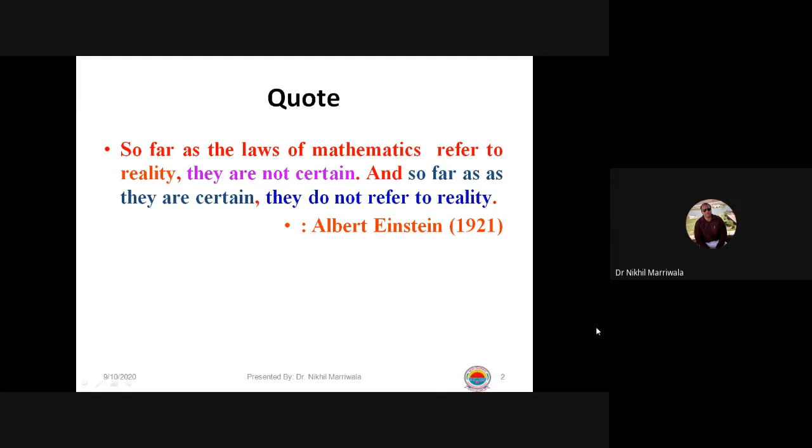And this is true. So that is why we normally refer to his statements and his research work, or the literature that he has given, before we start anything of the mathematical part.

Similarly, because we are talking about fuzzy logic, Zadeh has to be quoted in respect, and he is known as the father of fuzzy logic. What he said is also very important for us to understand: as the complexity rises, precise statements lose meaning, and meaningful statements lose precision. This is very important, because we are dealing with some ambiguous, very complex systems which are normally used in daily lives, and we will be designing one of those.

So when we are talking about some ambiguous systems, we need to understand what the concepts are and how effectively we can resolve the problems. Zadeh has given us very important input on this particular aspect, and we will be using this while we design the system.

This particular lecture would talk about all these aspects: the introduction, motivation, objectives of what we want to achieve, the basic block diagram. I'll show you some of the literature review also for this, because I'm trying to gather a working model for a greenhouse system, and then we'll talk about how the process flow happens. I'll show you the working model also.

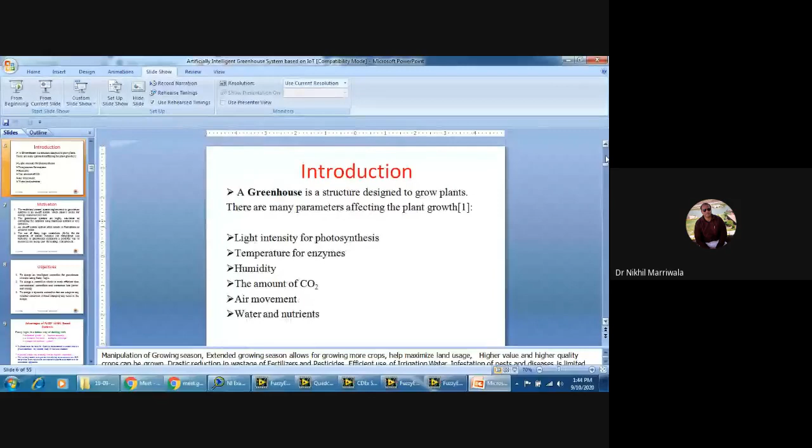I don't know what happened, this is just stuck. I'm so sorry, the presentation just got stuck in between. Nevertheless, I think there was a problem happening there. So, are you able to see the screen clearly now?

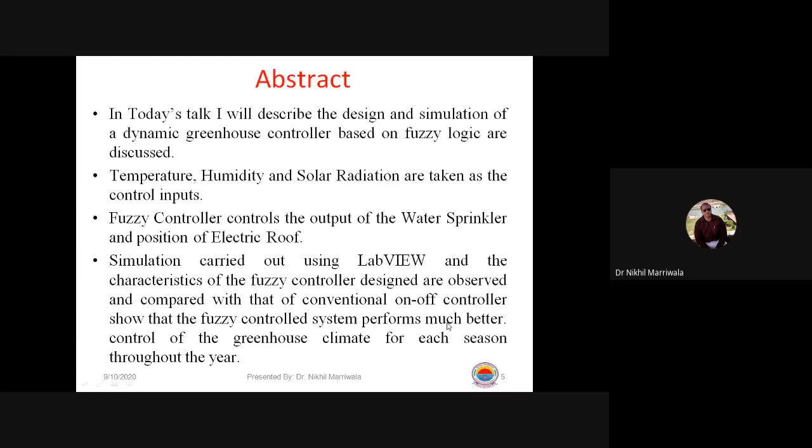So what is a greenhouse? For the benefit of those who don't know, basically it is a structure designed to grow plants, and there are many parameters affecting a particular greenhouse structure. This is an artificial structure we erect to artificially grow or provide an environment where plants can grow under controlled conditions.

So what is done is that light intensity for photosynthesis is controlled, the temperature for the enzymes is monitored and controlled, humidity is controlled, and the amount of carbon dioxide, air movement, and water nutrients are basically controlled in this.

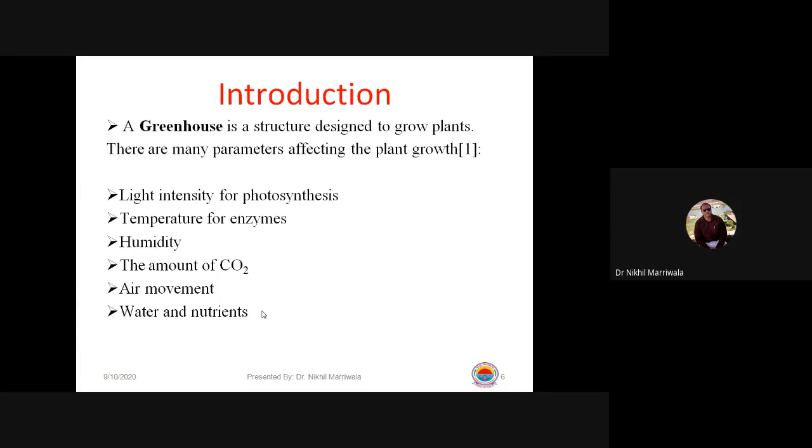A structure which helps us grow plants irrespective of the temperature, irrespective of the seasons or other things. So we will be monitoring and trying to control this artificially through an artificial intelligence technique, namely fuzzy logic. So the traditional greenhouse systems basically are,

if you've seen it, they normally work on on-off systems. So we are trying to replace this on-off system with a fuzzy logic controller, and it will analyze the inputs and then produce the output accordingly.

Greenhouse systems are highly non-linear in nature, very complex because they deal with many aspects in real time. So this is one of the best examples I could have quoted for fuzzy logic implementation. The use of fuzzy logic controllers thus becomes very easy for us to implement for these kinds of systems, like the greenhouse.

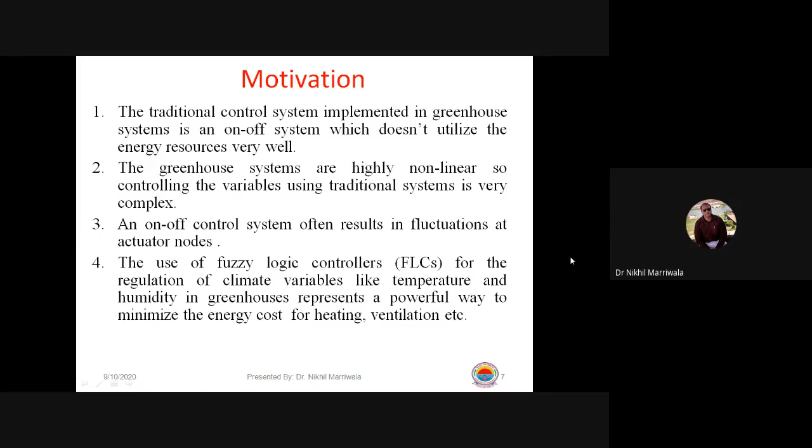So the objectives are very clear for us: we need to design an intelligent controller, and it will be intelligent because we'll be utilizing the AI technique of fuzzy logic. So to design this controller,

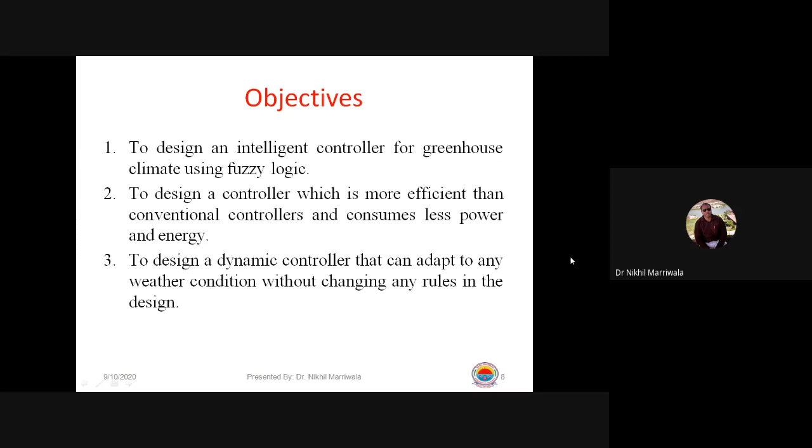we want more efficient controllers, to increase efficiency and ensure that less power is required, because a lot of power is wasted in opening and closing of vents in a greenhouse, or starting the water sprinkler. We want to save the farmer money in all respects. That's why we are talking about designing a dynamic controller based on fuzzy logic.

Now, what is fuzzy logic, basically? I hope everybody understands this. Fuzzy logic is a system dealing with ill-defined values, ill-defined systems, imprecise knowledge, ambiguous conditions, and highly complex, non-linear systems are taken into consideration when we talk about fuzzy logic. So it circumvents the need for rigorous mathematical treatment.

And when we talk about mathematics, we talk about some modeling that needs to be done for the system we are trying to prepare. And it provides linguistic expressions for us to actually understand what fuzzy logic would talk about.

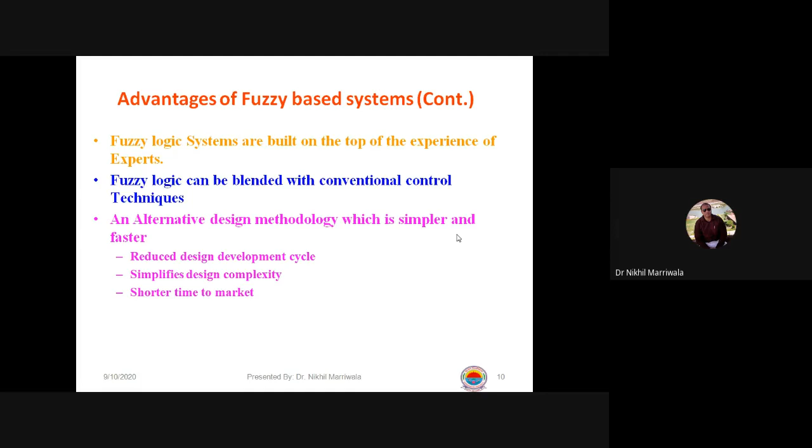Fuzzy logic systems are built on top of the experience of experts, and fuzzy logic can be blended with different conventional control techniques. So this is what we are trying to do: we are trying to blend it with the on-off controller, replacing that on-off controller with a fuzzy logic controller.

So linguistic variables mean we will be referring to if-then-else statements, and these if-then-else statements are basically the backbone of any fuzzy system designing.

And once these are fuzzified, the rule base is generated in a linguistic manner, that is, if-then-else. So if temperature is this, humidity is this, solar radiation is this, then the output is this. So this is the implementation.

Once the implementation of the rule base is done, the defuzzification model is utilized. The defuzzified output is then given to the greenhouse actuators - the water sprinkler and the opening and closing of the roof, done via the controller. So these two behave accordingly.

So we'll see how this model comes into picture. We'll try and see this thing. So what I'll do is I'll just show you the system first.

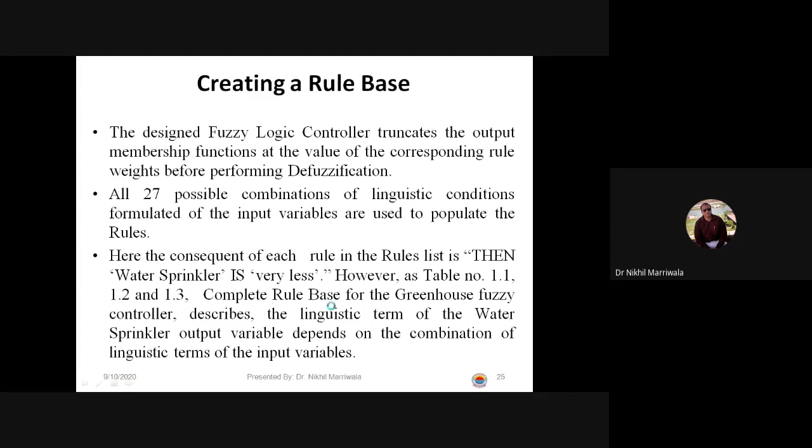I will come back to this. Yes, yes sir, 147 is the last. Yes, I have got it.

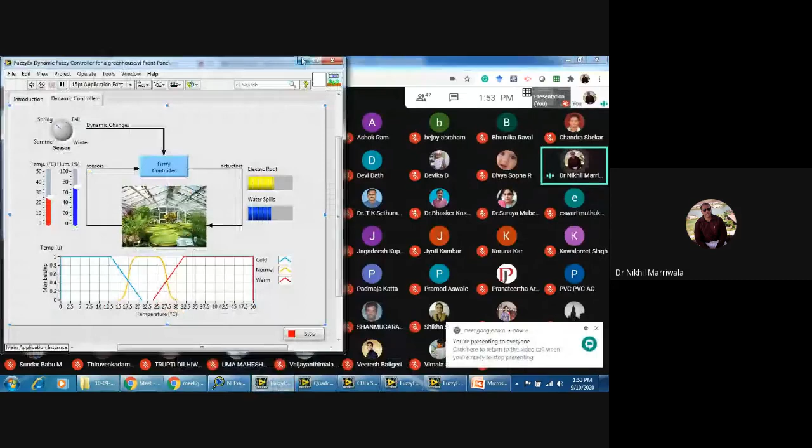Okay, so what I'll do is I'll try and explain now how this fuzzy system basically behaves. Now this is the model that I was trying to show you. There is one thing missing in this model right now - I told you I'll be talking about two models, so solar radiation is still missing here, but what you have is this fuzzy greenhouse basically.

This greenhouse is being controlled or monitored by different sensors over here. Now these sensors are controlled by the seasons also - dynamic changes happening, and the output is electric roof and water sprinklers. I'll tell you how to design it, right?

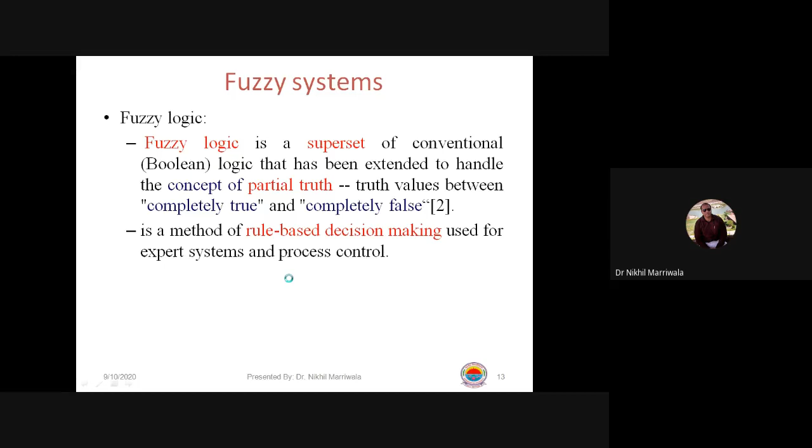So I'll just go back to the slides again and start with the literature review part. So fuzzy system - basically what fuzzy is all about is rule-based decision making, and we will be making some rules and then analyzing it on the basis of certain decision-making ability of the system. So we will be utilizing these things.

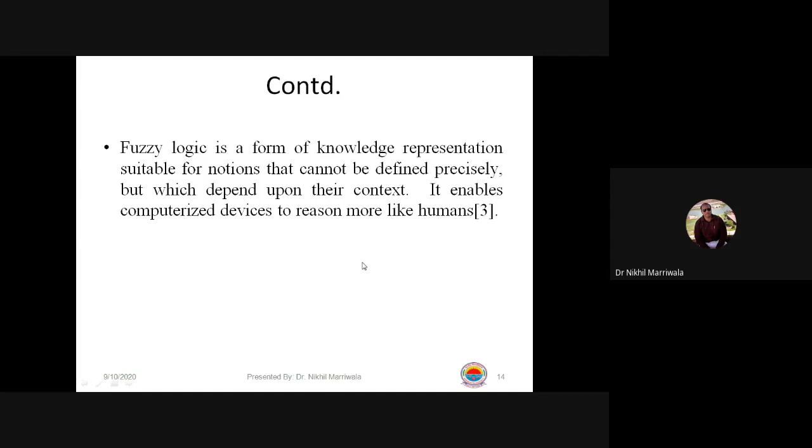The fuzzy logic basically is a form of knowledge representation, and hence we humans are being driven and monitored by different computerized devices. So the fuzzy logic controller is also one of those devices which is actually driving us in the form of linguistic variables.

So linguistic variables are what? They are temperature, humidity, solar radiation. As far as the greenhouse is concerned, it can be brake, speed, etc. - many inputs. Now see, temperature can be freezing, cold, warm, hot - these are some conditions, linguistic variables, right?

Humidity can be high, low, medium, whatever you want to talk about. So these are some things that we normally talk about in our own normal language. We have to represent this in the form of some modeling. So this is what we call fuzzy modeling, and linguistic terms can be represented in different categories.

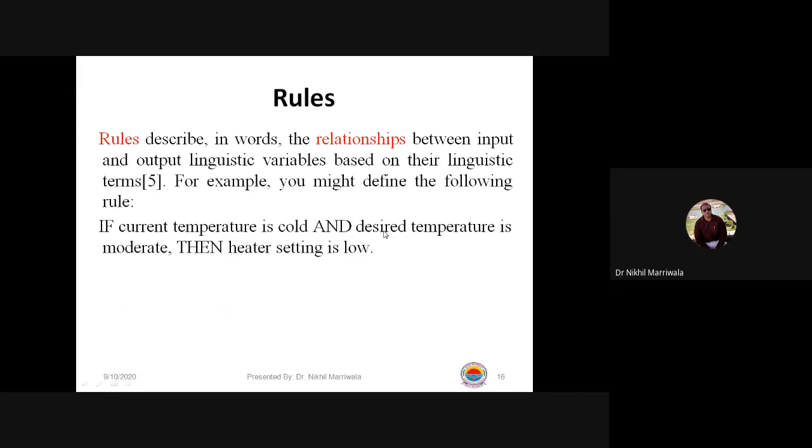So using these categories, we'll form some rules, and once these rules are formed, again, I told you that the defuzzification will be done after this. So how are they done? This is the one that we'll do.

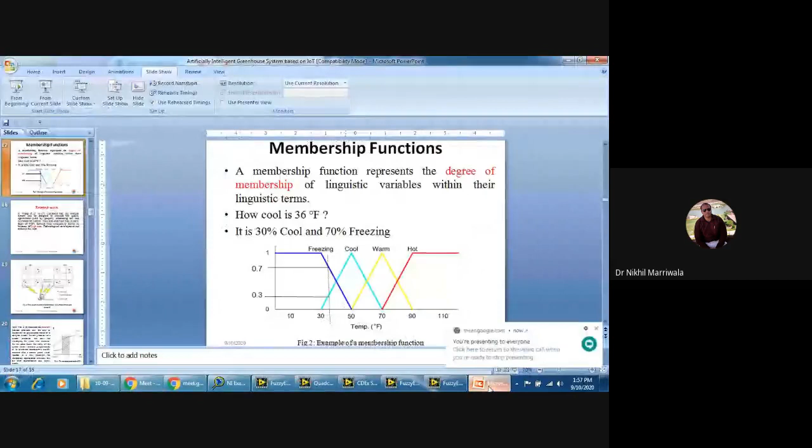Are you able to hear my question? Sir, once again repeat the question, sir. I'll show you the question again, ma'am. This is here, okay, right? So this is the diagram that you can see. This is a temperature in Fahrenheit, and I'm asking how cool is 36 degree F?

36 degree. How cool? Yeah, how cool? In between freezing and cool, sir. Yes, yes. So this is what I wanted to just know. Now you've answered very correctly. It is in between. There is no correct value given, 1 or 0, if we represent it in the form of digital, right?

So it might be 30% cool for somebody. It might be 35% cool for someone, and 75% freezing or 70% freezing. So there can be some variations in this, right? Now, how will we deal with these ambiguous inputs that are coming in? What I'll do is I'll show you how we do it.

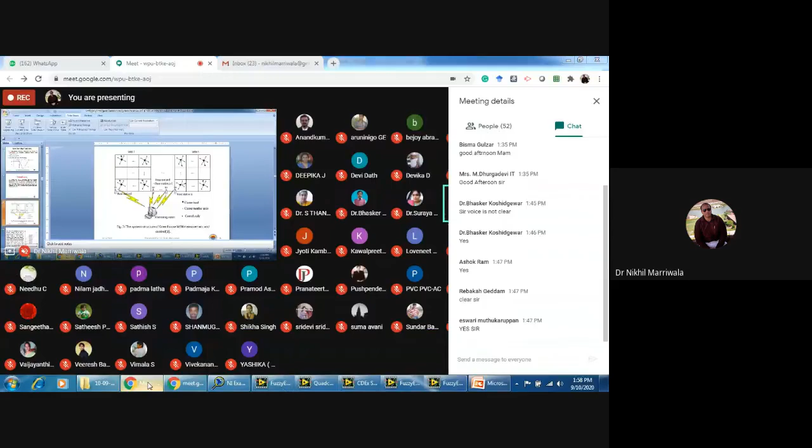So I'll straight away move to designing of a particular system here. Now what I'll do is I'll show you. So again, we move back to our old software called LabVIEW. Now I hope everybody is familiar with the environment of front panel and block diagram. And once you install this, you will see control design and simulation coming over here, and you'll see a fuzzy system designer, right?

We have tools, we have control design and simulation, and we have a fuzzy system designer over here. You just need to click on this now. Have a look what would happen after this, and we will be using this in several systems, and I'll show you how effectively you can design things. Right now, this is the fuzzy system designer. We will have variables, we will have rules, and we will have a test system after this. Right, I'll show you the entire thing.

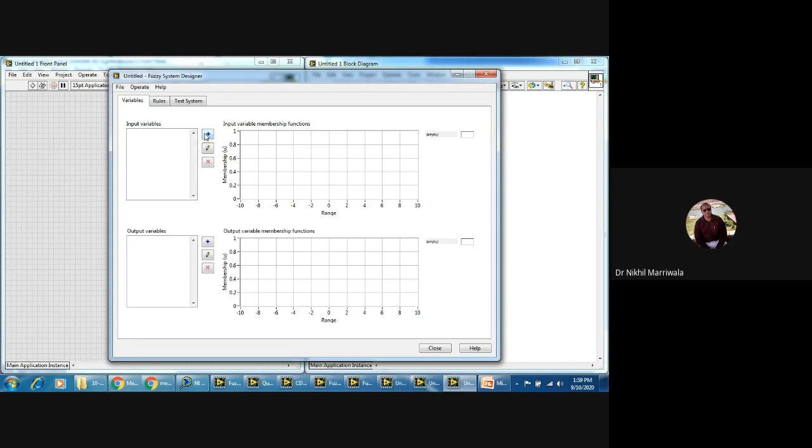So the very first part, just see it very carefully. You will be able to do it. You can do it in MATLAB also, but this is easier and more user friendly because this is a GUI, graphical user interface, right? So say we take this example of temperature, humidity, and solar radiation, and I write temperature. I have to mention this temperature, and say the range is from 0 to say 60 degrees. Okay. So the scale changes.

Now temperature can be either hot, cold, moderate, right? So I say hot. Here are the membership functions that I was just trying to show you. Say hot. I use a triangular input and I can change the color to red. So hot means say 50 and say 30. I'm just taking some random values, right? So you see the change has happened.

I can add another value, moderate. I can write moderate over here, and say I use a trapezoidal input now, and I can change the color again. I'll use a darker color so that it is visible, right? Fine. So we can start with 55. 45 is fine with me, and 25 can be taken, and then it will be 0, right? So moderate, and then it can be cold.

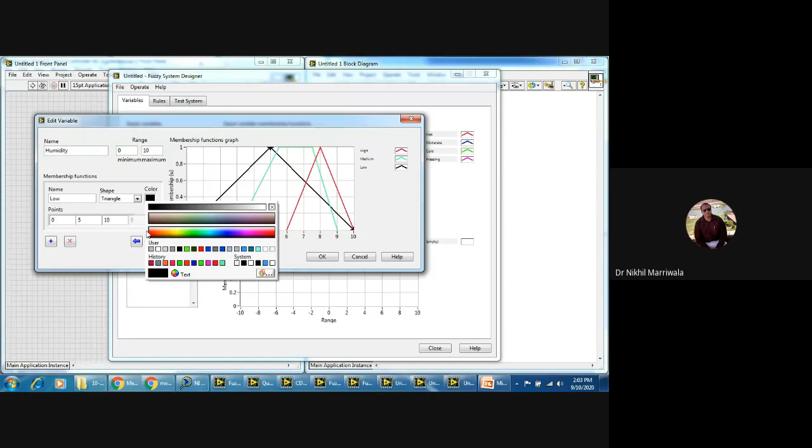Say I take a trapezoidal function, and I change the color of this line. I may not start with 10. I would say I start with 9. 7.5 value is taken. That is fine with me. 6.5 is another value that I want, or say 5.5, right? Okay, fine. This is just a small change, and I end at 3. So this is another value, medium, and then low humidity. I can take a triangular function again. I can just change the color over here. Already green has been used, so I think I should take a pink one. Yes, right.

So we can start by 5, 3, and then a 0, right? So now you can see we have two inputs, temperature, humidity. I can add a third one also, because for our system we are taking three inputs: solar radiation. So solar radiation maybe from 0 to 100 I can add. I don't mind that. This is just a random value again.

I am repeating it. So solar radiation is high. High, when it is high, I need to just specify that. 100, and 90, and then I can take it to say 80 value, or say 70 for that sake. We can see something happening: high, medium, and then again I can take a triangular function, whatever you want to do. So I'll take a medium as 90 to 70,

and then to 50. Okay, so you have another value coming over: medium, then low, right? So another triangular function is here. And I can start with say 60, 30, and say till 0. So I think that doesn't matter to us much.

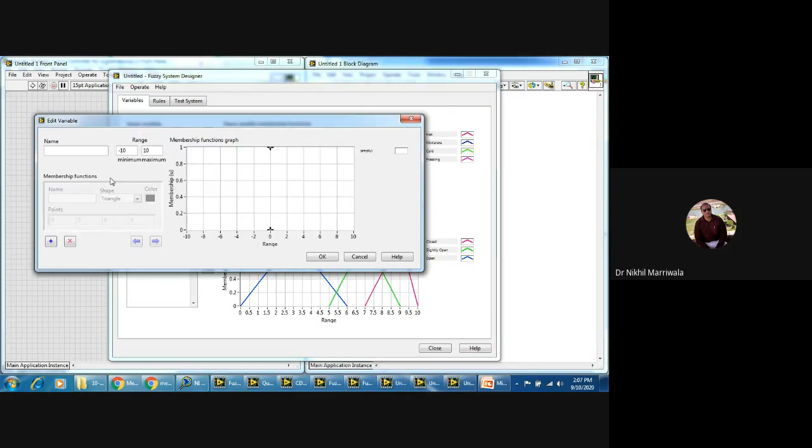So when it will be open, I can start with 6 and 3 and 0, so it will be open, right? So we have a water sprinkler over here. You can see this also added now. And the other output should be what? The roof, opening and closing of the roof, right? Again, you can use some values in this case. Add a value.

Say fully open or fully closed. I can write this name, and say I change this value 10, 9, and say 7. Fully closed. Add another value to this: slightly open. So you can see I'm just talking in our own language only, right? And still I'm trying to analyze the system. I'll show you how this analysis is done.

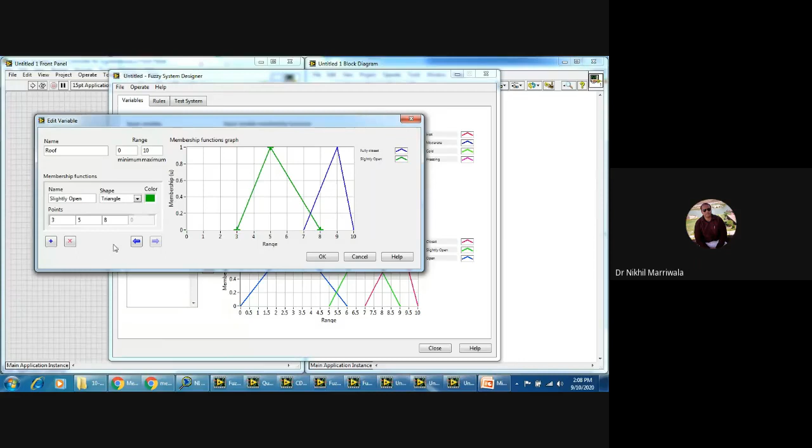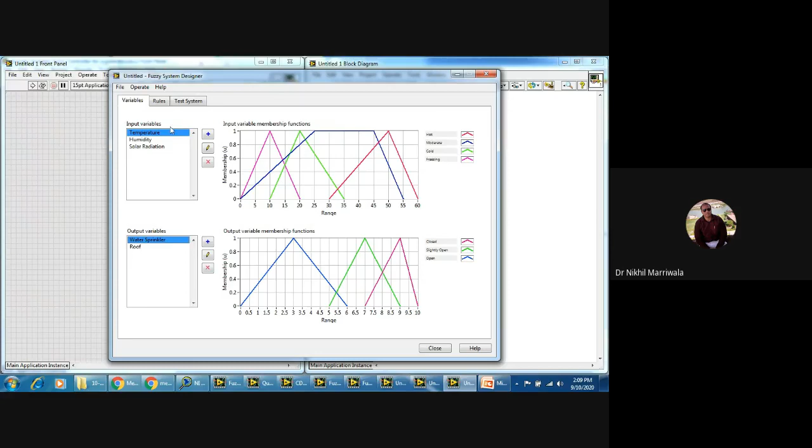8, say 5 and 3 over here, right? And it can be more open or whatever you call it, right? So 6, 3, 0, right? So we have just created the things: temperature, humidity, solar radiation, water sprinkler, and roof opening, right? So some random values have been created here. This is Fuzzy System Designer in front of you.

Now we move on to rules and we will formulate some rules. So you need not do anything. This is the beauty of this system. Have a look over this. Add rules. I just pressed add rule. If temperature is hot, then water sprinkler is closed. Now this is a simple rule. Now what you want to do is you want to add some further things to it.

So what you can do is, if temperature is hot, humidity is high, and solar radiation is also high, then what happens? Then water sprinkler is closed. Or you can do another thing, then the rooftop also is fully closed. Now you can see the addition in the rule happening over there. Can you see this? It has automatically been added. So I add another rule.

If temperature is hot, add another antecedent. Or say I change moderate, medium, add another consequent to it. Slightly open, fully closed, more open, and you can do whatever you want, right? Are you able to see this? Are you able to acknowledge what I'm trying to do here? Yes, yes, yes, sir. Now can you see how easy it is? Yes, sir.

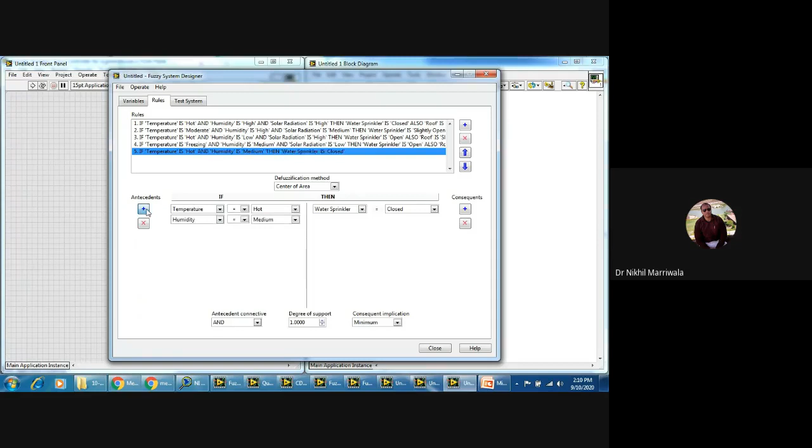Right. So I'm just randomly selecting things. I'm not doing any other thing. Yes, I can definitely make my rule base according to what I want, right? So there can be so many rules that can be made, and if you see, it is very interestingly poised for us that we have nothing to do in this case, but we are able to analyze our linguistic functions. So say I have made some 5 rules for myself.

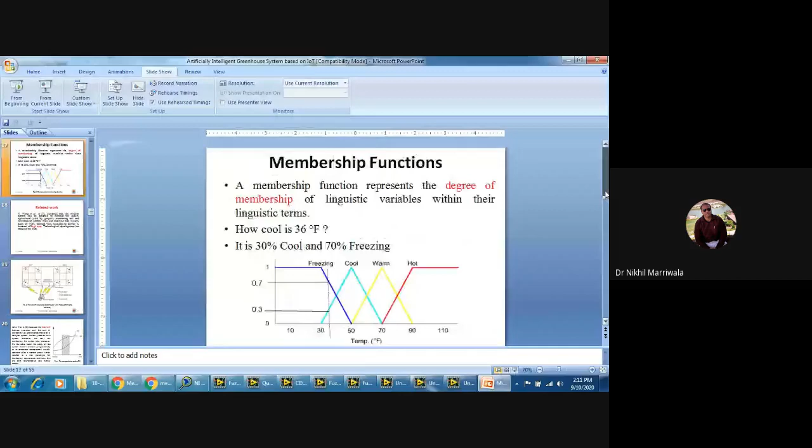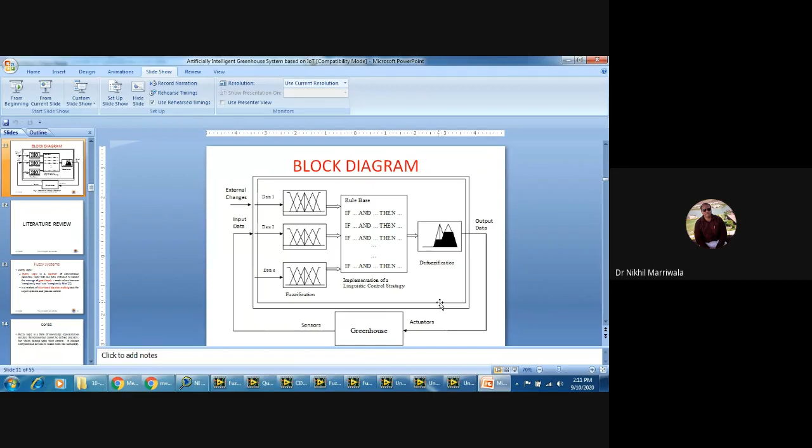So the model that I showed you, I'll shift back to the slide and show you the model again, right? So that we do not divert from that. Inputs, right? The membership functions, the fuzzification has been done. Now this rule base has been formalized. Now what we'll do is defuzzification, right? So have a look. We have variables over here. We formulated some rules, and now the test system. I'll show you how.

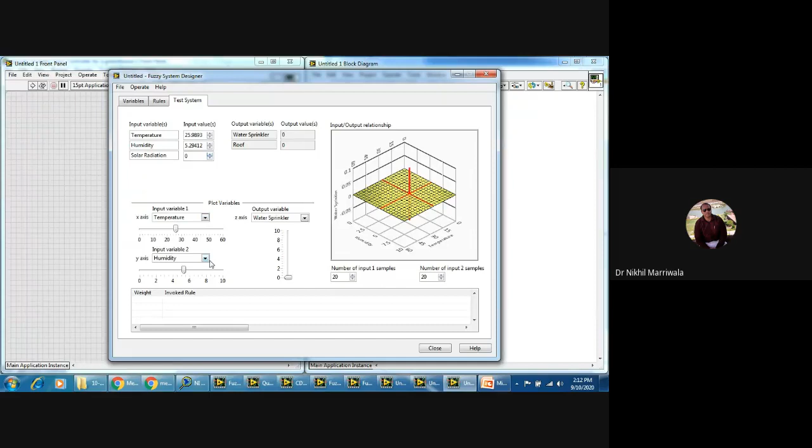Temperature. I'll just move the slider. Humidity. I'll move this slider to this, right? This is the output. Now this will be automatically controlled. Just have a look over this. And this is the rooftop, right? So you can view them, and solar radiation also. So as soon as I've changed this, now you see the values changing in the output part also. Can you see the change happening? Right? So pre-generate the rules. Yes, okay, do it, and you see the output over here. Can you see this?

Now, according to the temperature variation, the invoked rules are also coming at the bottom. You can see the changes happening. Even for solar radiation, right? You can see the rules either increasing or decreasing, and the weights are also coming into picture. And the pointer of the water sprinkler is moving automatically, though not much, but yes, it is moving, right? Now you can see the drastic change happening. Can you see this? Now this is the automatic process that has happened.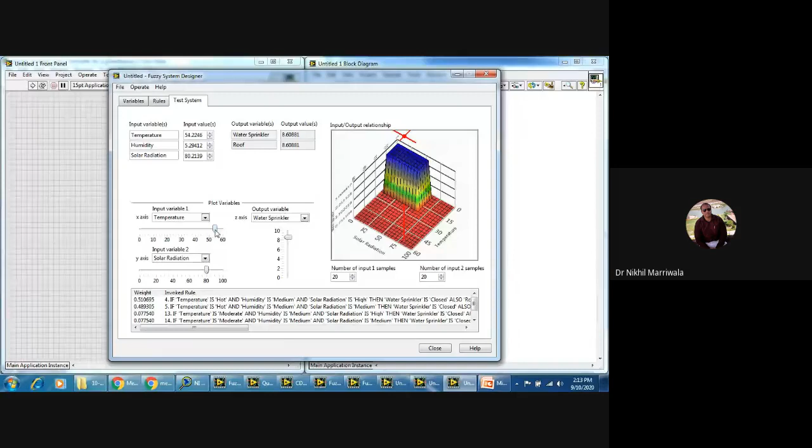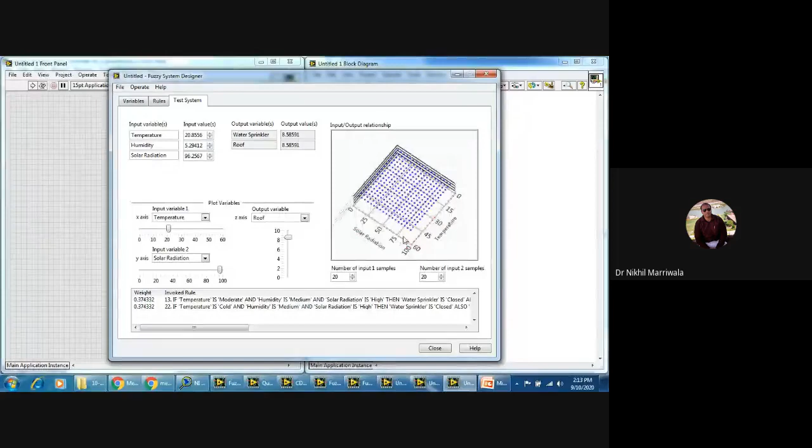You can see, right? Now if I change this to roof, again you will see the chart also changing. You will see the variation in the rules. So this is very much artificially intelligent control that we have tried to formulate for our problem, right? And the changes can be definitely monitored by authority. Am I clear up till this point, please?

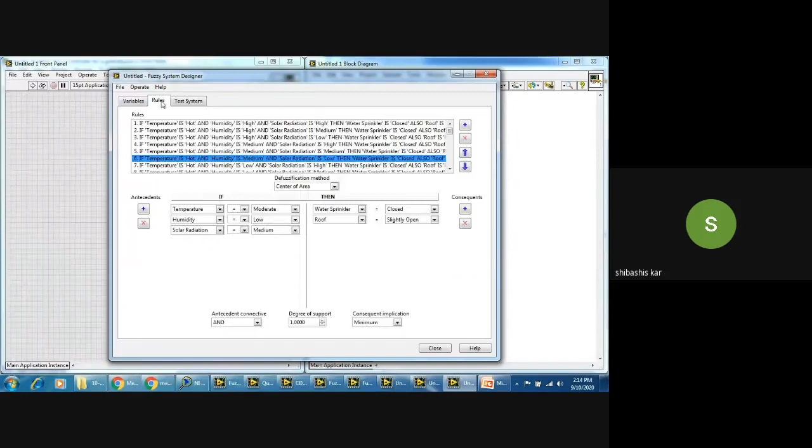You need to tell me. Can you see this happening? Now this is happening automatically again, I repeat. I'm not doing anything, I'm just varying the inputs. The weights are changing, the output graph is changing, the water sprinkler is automatically being controlled. Now this is what I wanted for my automatic system. Clear, sir. Very good. Very good.

Thank you very much. Which version of LabVIEW are you using? See, Pramodji, I'm using the least available version right now. It is 2013, sir. And right now, LabVIEW has offered 2020. So I'm using a very low version, but still I'm able to perform all my steps and all my things using this.

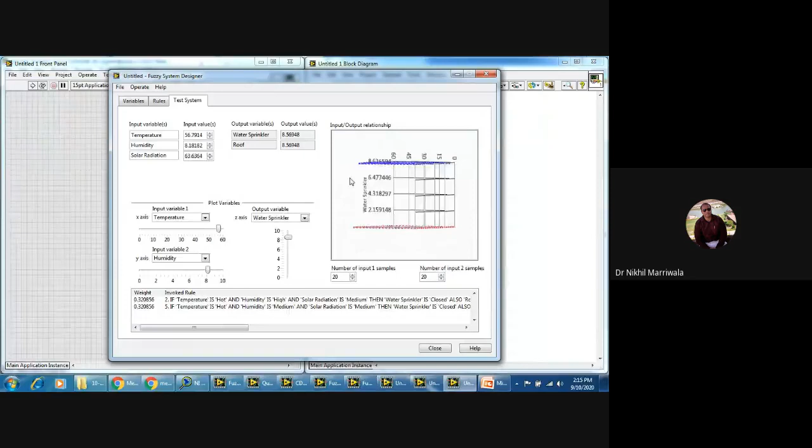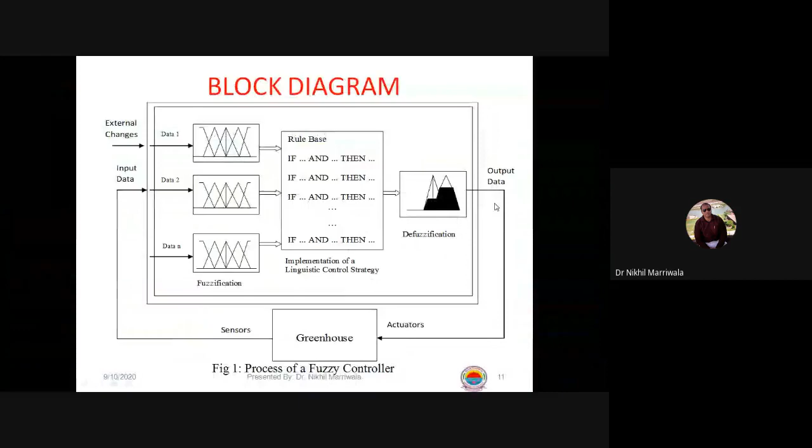So you can rotate this also. These are the graphical options that are available in LabVIEW, and this is why I love this software. This has tremendous capability as far as graphical programming is concerned. So you can see this. Now we have designed a structure for us based on all this format. So I'll move back to the slides and show you how these things are done.

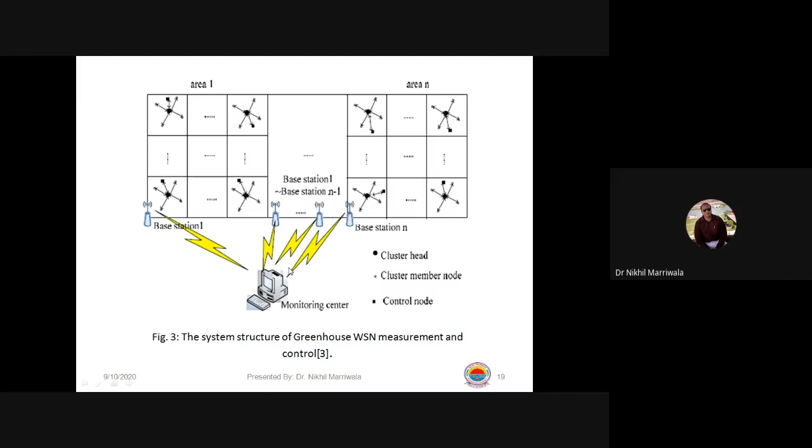So from the literature we tried to read, whatever I got was that we can definitely implement this greenhouse controller using wireless sensor networks also, which are controlled by IoT devices, right? So we need to divide the area, put sensors there, decide about the clustering model, the cluster head selection, etc., what needs to be done in the WSN part, and then we can acquire the information onto a base station. The base station then transfers it to the monitoring center, which will then control the greenhouse controller in the required format.

Right. So these are some of the literatures, you can see them. Some of them are using PID, some are using Boolean algebra. Fuzzy is also being utilized, and we are basically talking about the fuzzy model, right? So this is the controller that I now want to implement onto the fuzzy system. I'll show you how this works. This is very interestingly working for us. Now see, the electric roof and water sprinkler are constant right now because the temperature is constant. I am just changing the temperature. Can you see the effect?

Just have a look at the effect of the water sprinkler and the electric roof as I am moving the temperature. Now I am moving the humidity. You will see a similar change happening in the water sprinkler, also of the electric roof. Right? So this is automatically happening.

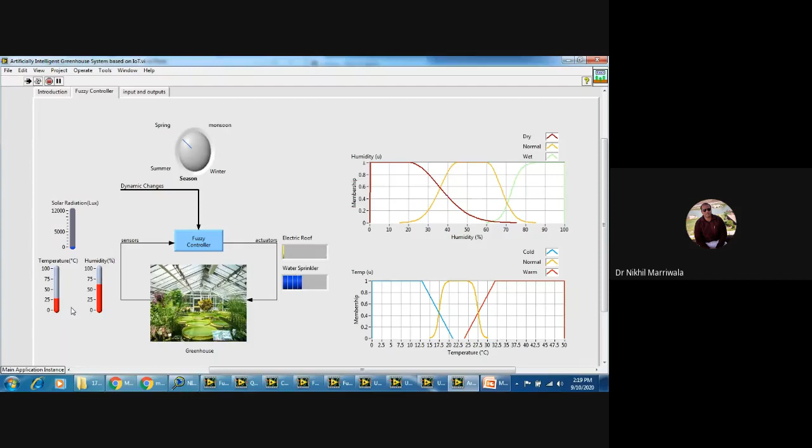What I'm trying to tell you with this model is that this is real time input being monitored, real time temperature and humidity, because they will not be constant. They are varying, right? Similarly, see the effect of solar radiation now, and similarly see the effect of the seasons. So as dynamically the temperature and humidity are varying, the electric roof and water sprinkler is also varying.

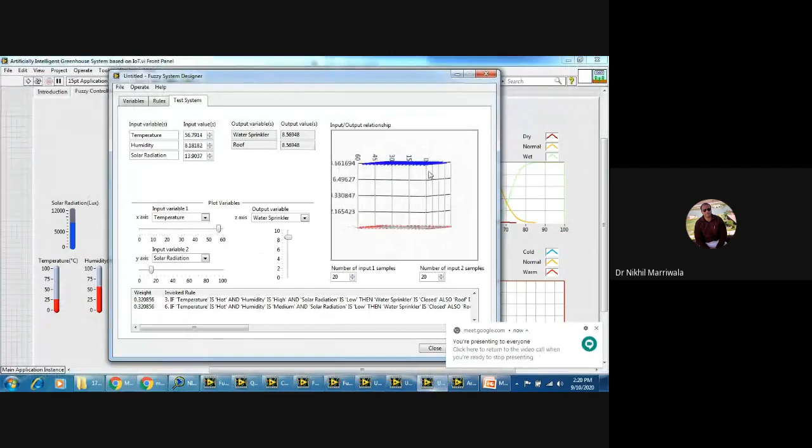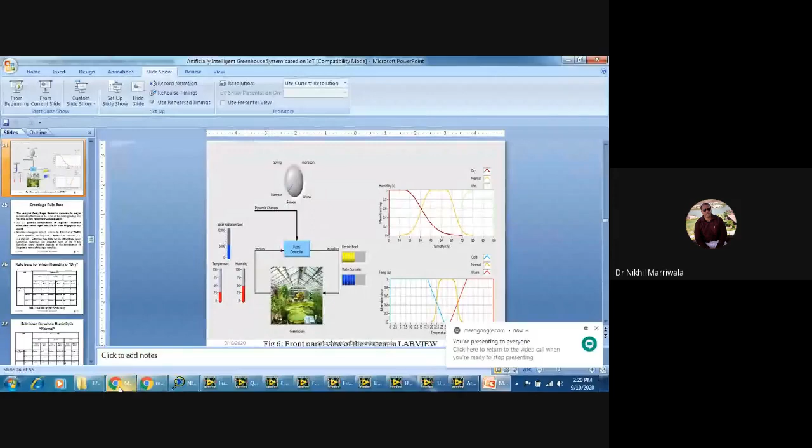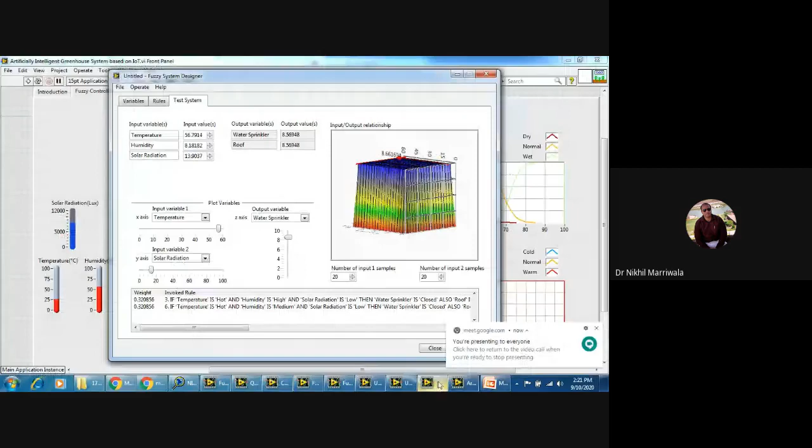Excuse me, sir. Pramod ji is trying to ask something, I think so. Sir, is this fuzzy logic toolbox available in the evaluation version? Are you using the licensed version? Yes, I am using the licensed version, because our college has already procured this particular system.

Now, I'll tell you. When you install LabVIEW, all the toolkits will not get installed, right? So you need to download the toolkit separately. The interesting part is no toolkit is dependent on any other toolkit. So say you want to work on biomedical signal processing, you need to download the signal processing toolkit, and you can download the biomedical toolkit. Similarly, if somebody is working on robotics, he need not use the biomedical toolkit. He can just download the robotics toolkit.

But this toolbox we can install in the evaluation version? Yes, you can definitely do that. They will be installed, but only for 7 days, as per the new policy of National Instruments. No, sir, we can extend up to 45 days by giving the key. Okay, yes, there are several options. So you can definitely download all those toolkits. No problems at all. Thank you.

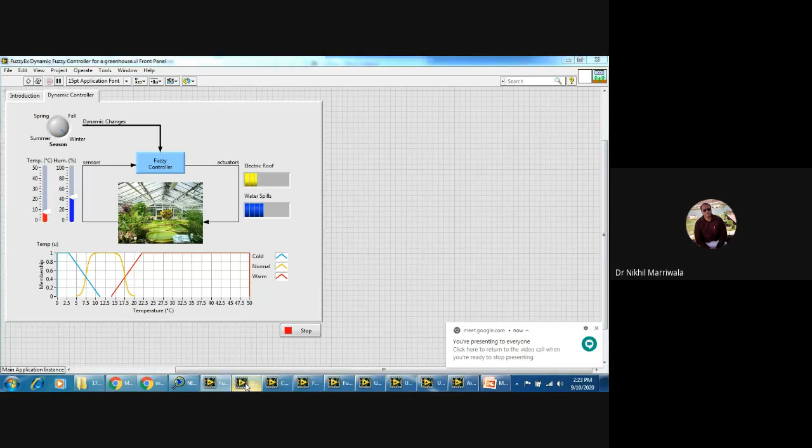So I hope you have understood what I'm trying to say and you have followed the system. Now I'll show you the beauty of the software further. We have already seen this greenhouse controller. Now I'm showing you a totally different aspect, a system which is again a fuzzy logic design. We have tried to create a fuzzy logic controller for analyzing or recognizing a pattern. This is an inbuilt example. I'll just run this for you, and you'll see what happens.

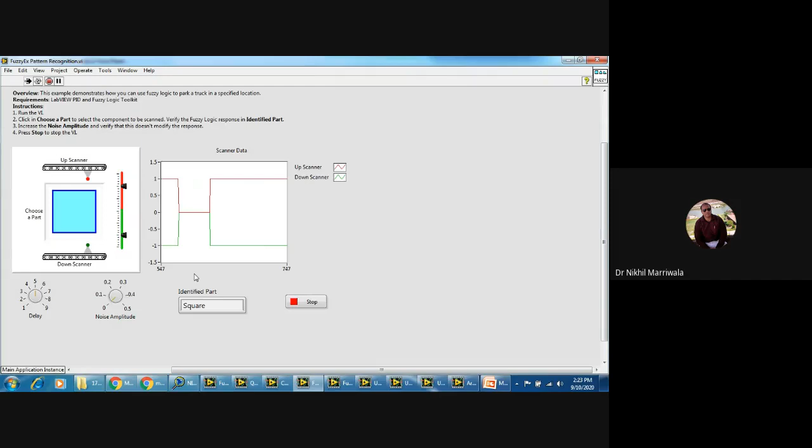So now if you look at this system, to analyze, I can change this. It is a right trapezoid now. So this is the output that you are getting. Again, this is fuzzy logic based, right?

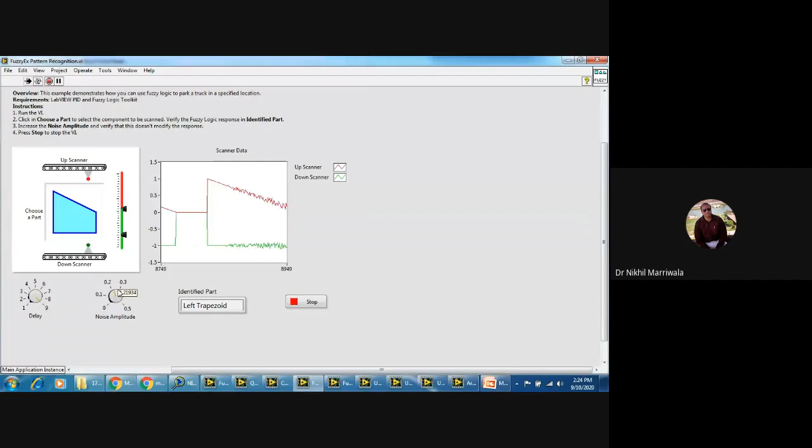This is basically a right triangle, and similarly we have a left trapezoid coming over. I can increase or decrease the speed accordingly. So this is the speed of this system. Also, I can add noise to this. See the noise added. Can you see this happening?

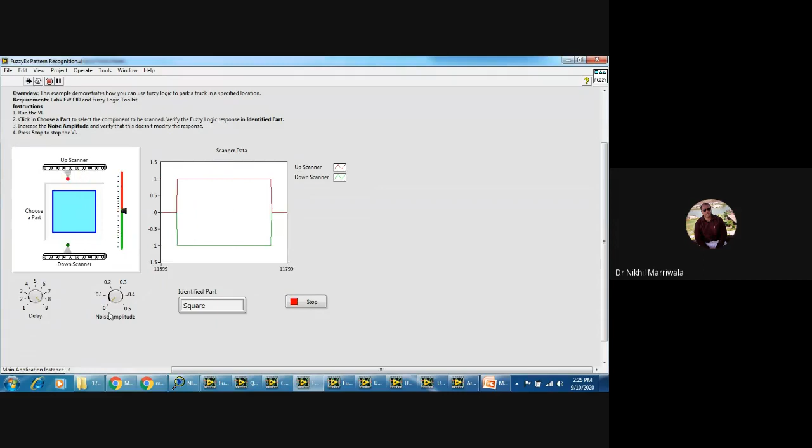Square. I've entered a square now. Again, noise is added. Noise amplitude. I can reduce it perfectly. Now you will not get any noise in this scanner data. Again, this is working on a fuzzy logic system, right? Rule-based system that we have just designed. So it identifies the edges, the axis, and then gives you the part. Can be used effectively in any of the industries, right?

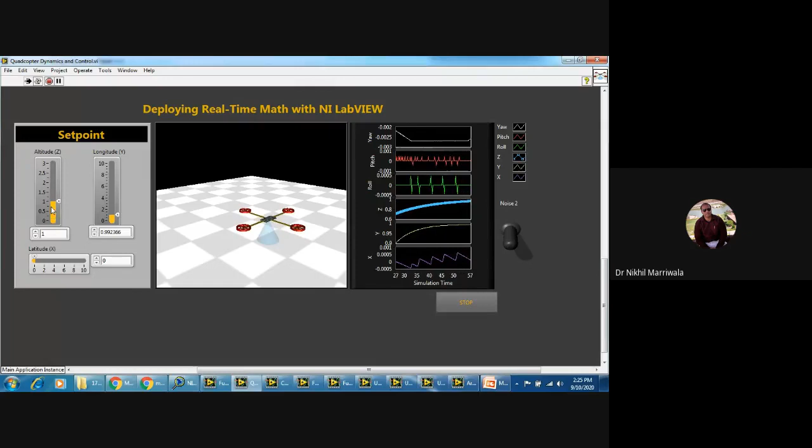Similarly, many people these days are working with quadcopters. So this is a simulated model of quadcopter dynamics, right? If you see, I'll run this for you. So you see a quadcopter rotating. Can you see that? This is the camera with which it is trying to analyze. And these are the controls. The altitude decreased, altitude increased. Have a look.

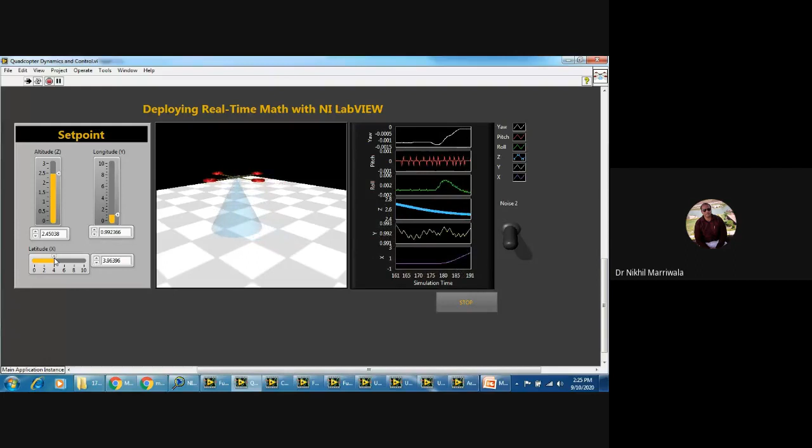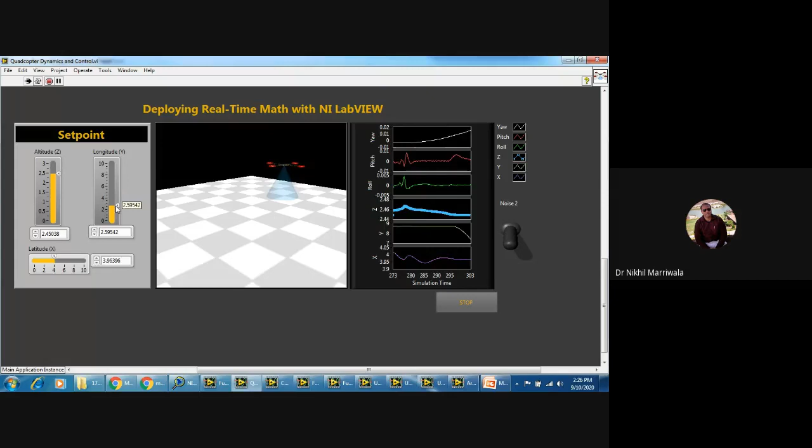The measurements are being done at your side. The latitude and the longitude being changed. So the quadcopter moves to a particular distance. You can see it is behaving exactly according to what we want. Noise. So this is the noise part, right? So many of you were asking how I can do that. So this is the control and simulation toolbox being implemented exactly in LabVIEW, right?

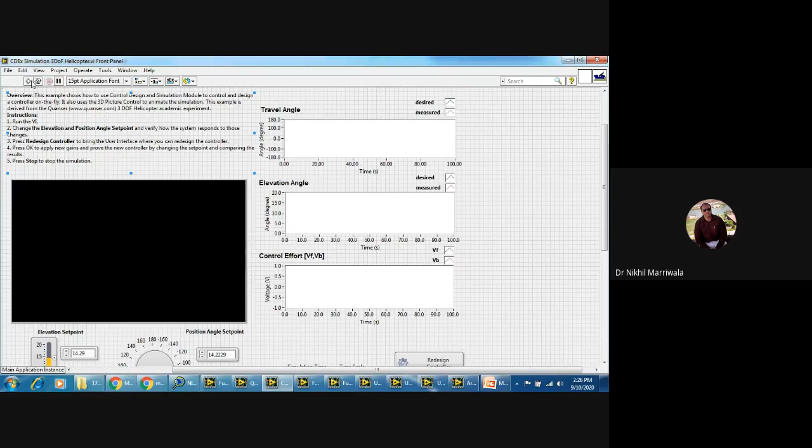So again, if you see, this is a simulation model of a quadcopter. Now I can take real-time inputs also, deploying real-time math in LabVIEW, right? So this is another important working model that is available. Another important model that I can show you is that of a helicopter over here. So can you see this? Have a look.

Elevation angle. I'm changing the elevation because this is a helicopter and this is fixed to a particular point. I'm rotating it. The output is also changing according to what I want. All these systems are effectively designed and redesigned using different controllers present in LabVIEW. So it is a LabVIEW toolkit, measurement and control, right? So this can be effectively done and the outputs can be analyzed.

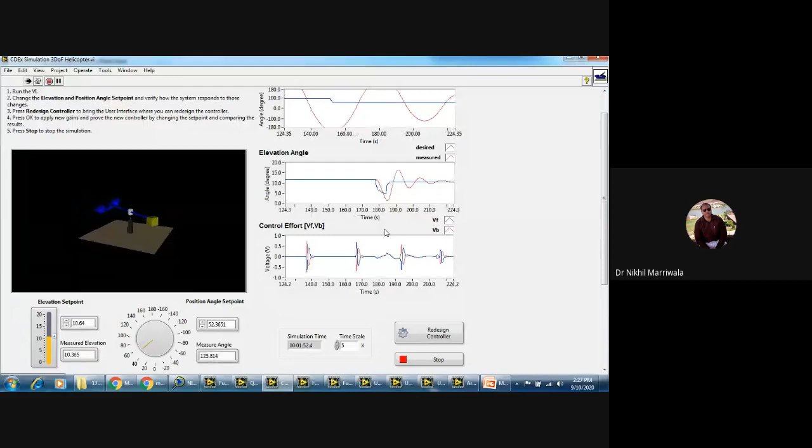This is the elevation angle, the control effort, etc. Right, so you can see it here. Travel angle is also here. So this is another important controller that can be utilized. I hope you are able to see this.

Yes. Yes, that's good. That's good. Sound is breaking. I don't know. System is working perfectly fine. Might be there is some call in between. Are you able to hear clearly now? You can switch on your mic also. That's fine. Thank you very much, Mike.

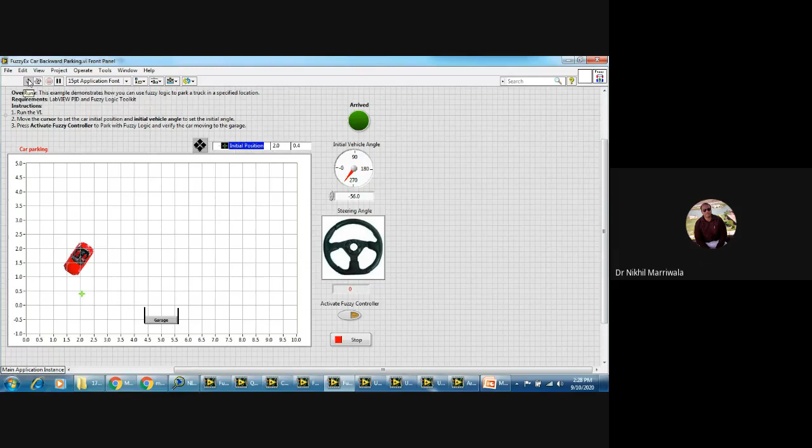So this was one of the models that I wanted to show you. Yes, this is an AI based system. Again, fuzzy logic based system. This is one of the last systems that I wanted to show you, and I'll tell you what this does. This is basically a car backward parking system, right? So we will see two types of actions being performed here. I'll just first run the VI and then tell you. Now have a look.

All are stopped. Right. That's it. So, fuzzy activate controller. Now have a look. So we started this VI and are activating the fuzzy controller. Now have a look at the car. So it is automatically parked in the garage and the light is also switched on, indicating that the vehicle has arrived. So this is all done with the help of a fuzzy logic controller. Otherwise, you had to steer this car on your own and then park it, right?

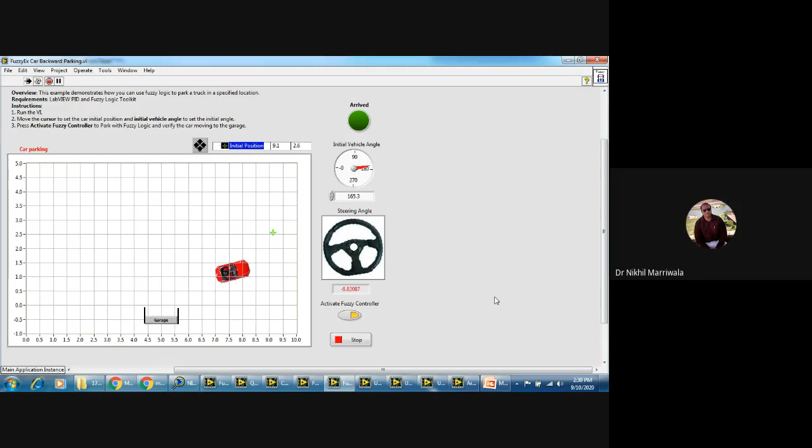So if I show you again, it might be at any position. So the car will be parked automatically in the garage. Say I move this car here now. I still want it to be parked. So have a look. The AI coming into the picture, the artificially intelligent system playing its part, and the car again automatically being parked, right? So you can place it anywhere you want. I'll tell you.

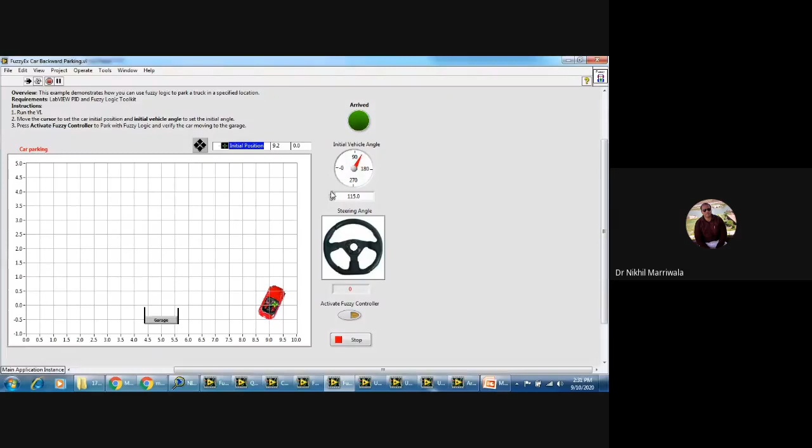Okay, I placed it over here now, and I activate the fuzzy controller. This was much easier for the fuzzy because there was some distance involved in this, right? So you can see the changes or the effectiveness of the fuzzy system. Now have a look. I can move it to any place, and the car is parked. And once it is parked, right? So you can definitely see. Now what I'm doing, for the benefit of everybody, I'm changing the angle also. Now see what happens.

It will now take some time, but still, yes, perfectly fine. The system has behaved and worked perfectly fine for us.

So you can design a lot more systems into this. Some examples, as time was there, I tried to show you all the examples that were possible. We have already designed a few things in LabVIEW, and I'm very happy that I got this much time with you. I'm looking forward to you being given some assignments to solve using LabVIEW, but not a compulsory one. Don't worry about that. But I would request, because you've already seen what kind of systems can be developed, that you work on some systems using the fuzzy logic toolkit or the biomedical one also, as I showed you in the last lecture, and solve or design some problem on your own.

There are so many things, so many more things that can be done. Now, what I want is some inputs from your side, so that I am able to understand that whatever I have told you and tried to explain has stayed with you and you're able to understand it clearly. So I'm waiting for the responses from your side now.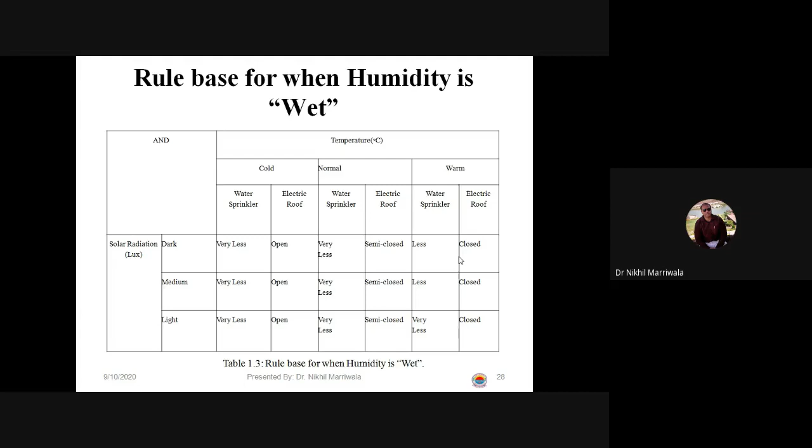Then we have solar radiation, temperature, cold, normal, warm, and again the rule base when humidity is normal, when humidity is dry, and the next part is the rule base when humidity is wet. These are some of the things.

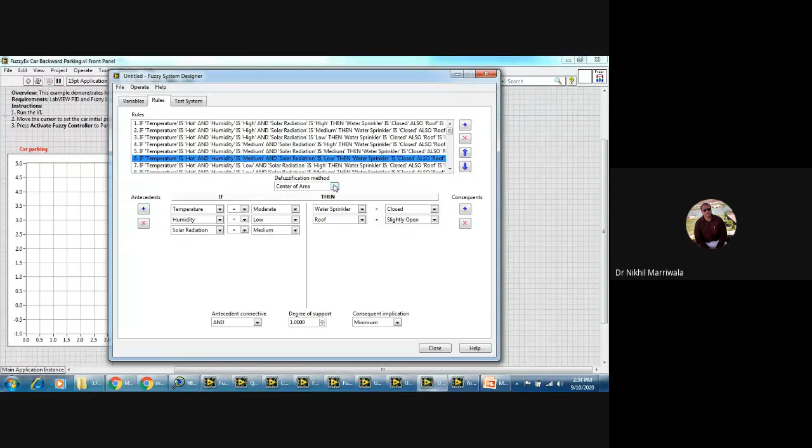Then the last part is specifying the defuzzification method. I think I just skipped over that particular thing, so I'll show you again. Here it is, defuzzification method. Can you see this? Center of area, modified center of area, center of sum, center of maximum, mean of maximum. You can change to either of these. These are all the defuzzification methods available in the fuzzy system designer. You can change it, and similarly you'll see the output has also changed accordingly.

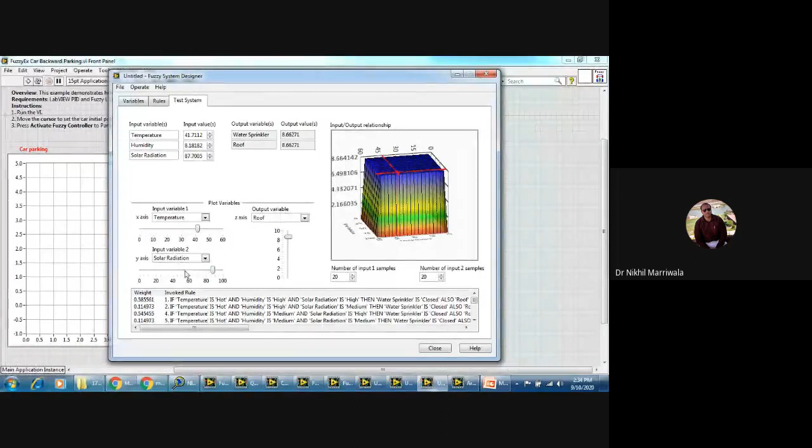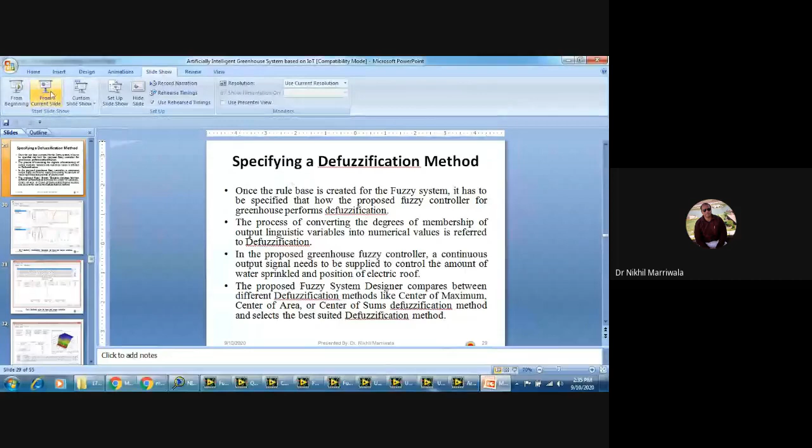Everything is being recorded as far as this input-output relationship graph is concerned. So definitely the same things can be done by you. This was it, the defuzzification method, and we need to specify this. So here we have used a certain kind of defuzzification method for us.

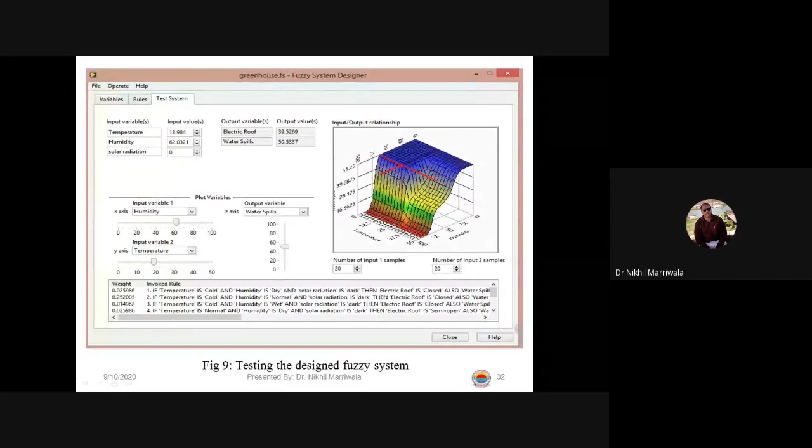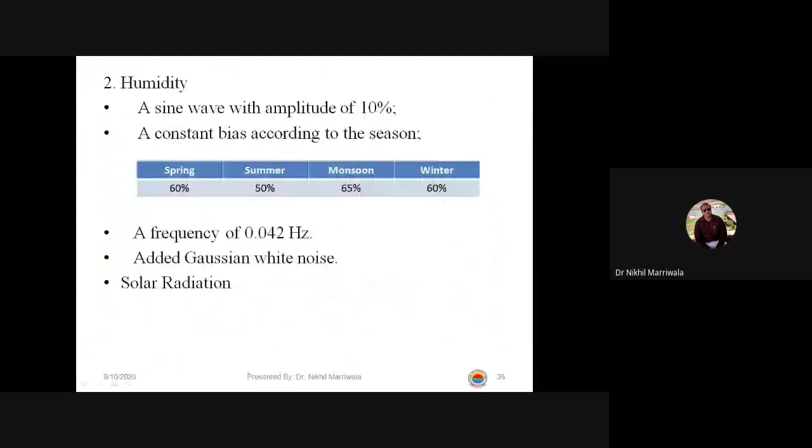So according to the input variables etc., these are some of the results that we got, and I'll show you practically rather than just showing you the slides. If I run this statement, this particular system, you can see the output, the water sprinkler output, the electric roof output here, and then the input that is coming. Effectively, we can export this to an Excel file also. We can export this data to the Excel file.

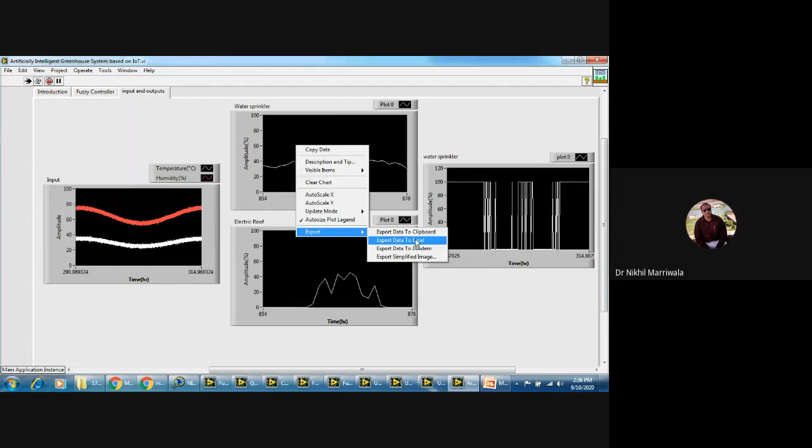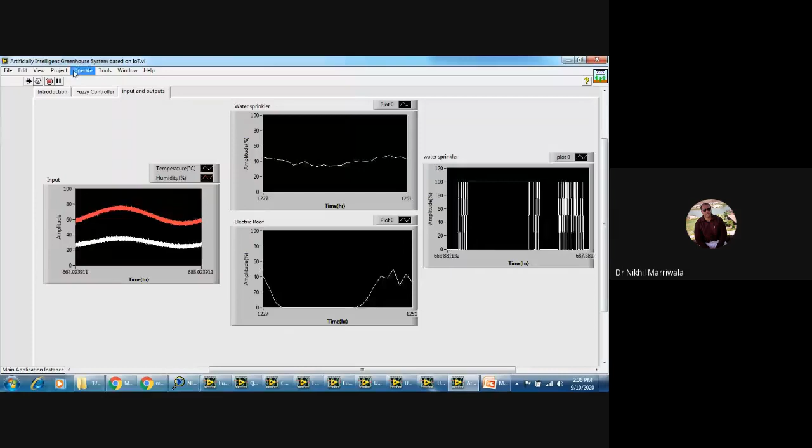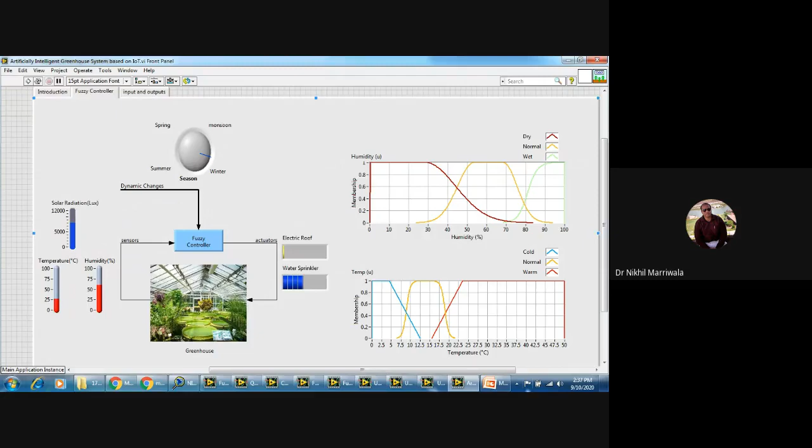So you can see the sheet opening over here. Similarly, I can export this data. You can see the values coming over. This is that simple; once you have learned how to design the system, it becomes easier for us. Similarly, you can change the seasons, change the output, the water sprinkler changing. These are some of the things that can be easily done.

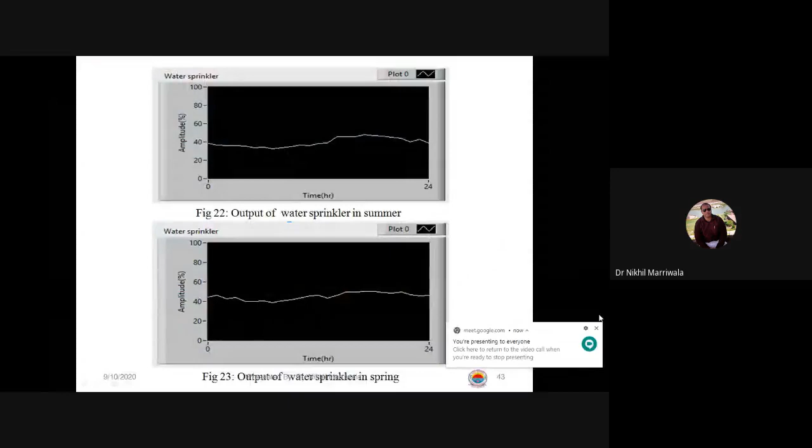Now I'm open for the questioning part, and I am very happy to see the comments that things are clear to you. As far as today's topic was concerned, I think I have almost finished this out. So this is the output graph and the tables that we have done.

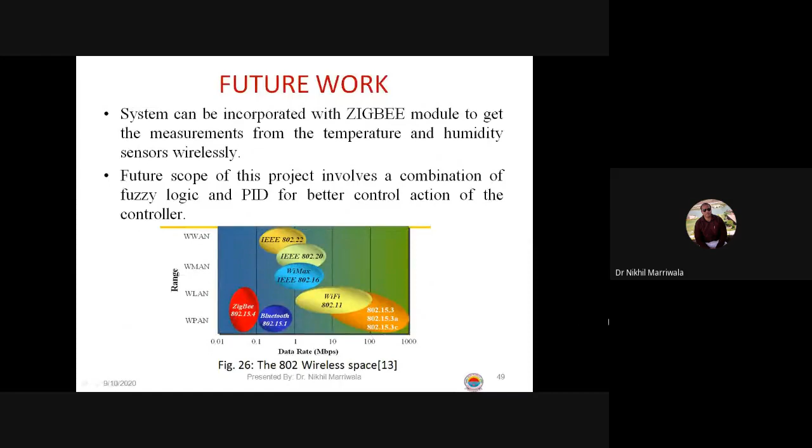Future work, there are so many things. There are PID controllers that can be implemented also using fuzzy logic. So that's it as far as today's lecture is concerned.